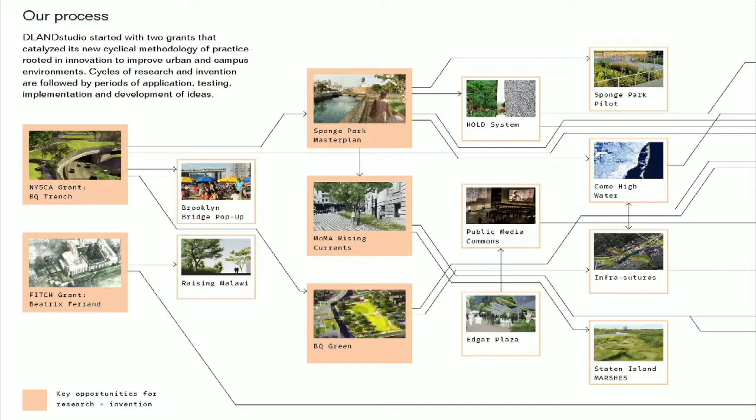So my practice started with a series of grant-financed prototypes, and each of these orange bands shows these grant-funded projects that were more theoretical, and the bands in white show projects that came out of that were real prototypes. I did that because when I started my practice, I was a small woman-owned business, and I couldn't get the kinds of large infrastructure projects I wanted to do, which tended to go to large engineering firms controlled by powerful public agencies that worked with the same old firms they'd always worked with. So you can see this evolution of grant writing and theoretical projects leading to real projects.

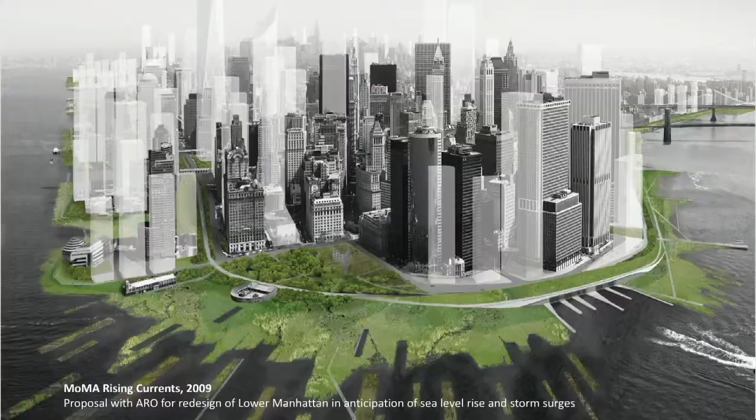Some of them have actually been projects like this, the MoMA Rising Currents project, which was on the theoretical end, obviously, but we worked with Architecture Research Office to design a complete revisioning of Lower Manhattan in the face of potential climate change impacts.

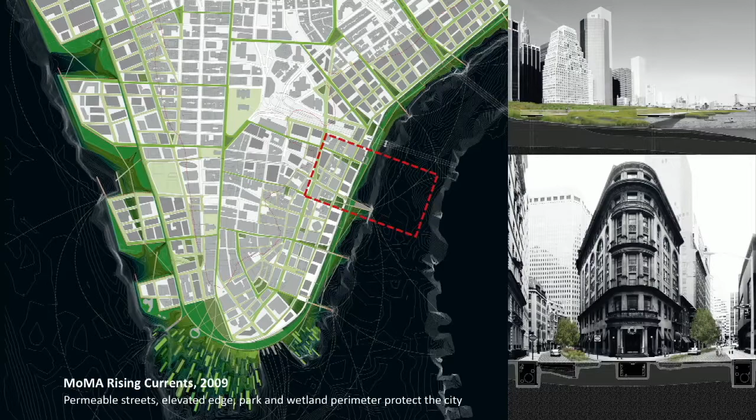So looking at preparing the city for a big storm event, which actually happened a few years later. We did this by reinventing the infrastructure, creating permeable streets, elevated edges, wetland perimeter, and using all these systems to protect the city. I think one of the things misunderstood about this project was that it was as much about an upland reinvention of the infrastructure by creating permeable streets and putting all utilities into waterproof vaults, as it was about creating a big elevated edge around the perimeter.

So a precursor to that project was actually the Gowanus Canal Sponge Park, and I think that's one of the reasons we were asked to participate in MoMA. We did this project in the Gowanus. It was a master plan for the Gowanus Canal area, which you can see is in Brooklyn.

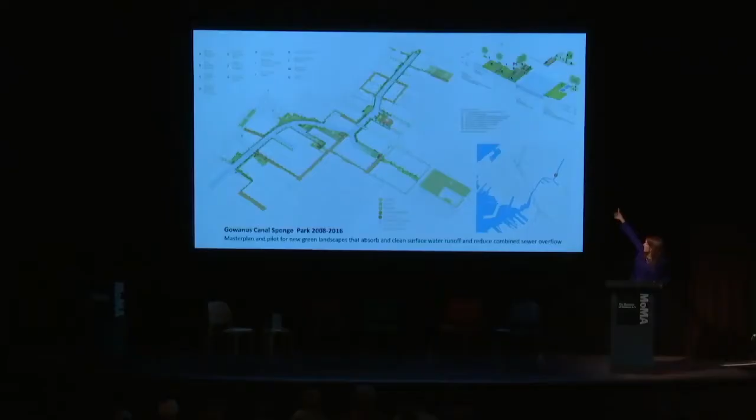This is very familiar to me, but this is Brooklyn, Red Hook, and the Gowanus Canal. It's now an EPA Superfund site, and it's undergone a tremendous transformation over the last decade, but it's a highly regulated landscape where there are over 200 permits you have to get for any waterfront project. As an example, in this diagram, the soil underneath the streets is controlled by the Department of Environmental Protection.

The ground is controlled by the Department of Transportation, which owns the land. The landscape, the green stuff, is owned by the Parks Department. The water that flows over the ground is controlled by the Department of Environmental Protection. The shade over the water is controlled by the Department of Environmental Conservation, a state agency. The sediment underneath the canal is controlled by the Army Corps of Engineers, although that shifted over to being controlled by the EPA Superfund people. So anyway, it was hard to get anything done there, to say the least.

But using grant funding and a pilot project, and doing it outside of normal procurement processes with all these grants, we managed to get a pilot, which is a new form of green infrastructure. This little street end, which may seem kind of inconsequential, took me 8 years to build because we're working in New York City in an EPA Superfund site. It absorbs about 2 million gallons of stormwater every year.

And when you take that to scale across the city, you could control 800 million gallons of stormwater every year. This is really important to the city because New York City is one of hundreds of cities across the United States under consent decree from the federal government because of their need to comply with EPA Clean Water Act rules. So there's tremendous potential here.

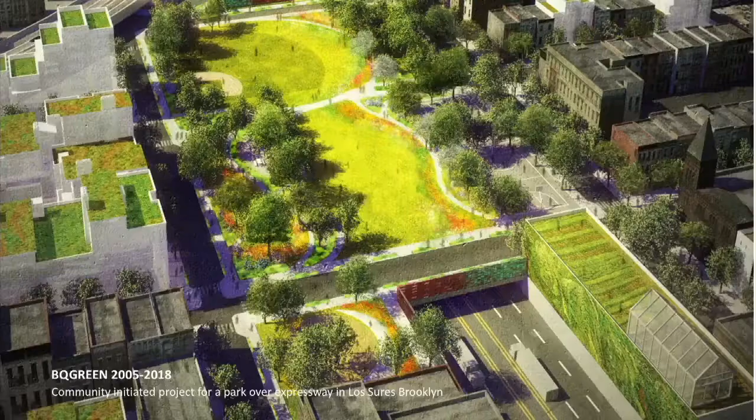Now this obviously applies to waterfront cities, but there are a lot of waterfront cities out there. So we're also working on trying to repair some of the really horrible things that happened because of the intersection of cities and interstate highways.

Highways weren't originally designed to go through cities. They weren't designed in a really friendly way to intersect with urban communities. This is actually a community in Los Sures, Brooklyn, where it was a community-initiated project, started with a woman named Diana Reyna, who brought us in to design this park over the highway, over the Brooklyn-Queens Expressway.

We've gone to tremendous measures to both design the park and create a superhero to advocate for the park, because we've really been fighting for this for many years. We've had rallies at City Hall and on the edges of the BQE because people in the neighborhood are being poisoned by the highway. The city really should take action and do something about it.

Building this park is one way to not only improve the physical environment, but also reduce some of the gang violence happening because of the rift created between these two sides of the highway, which creates a political boundary as much as an environmental nuisance. So that's something we've really been trying to ameliorate.

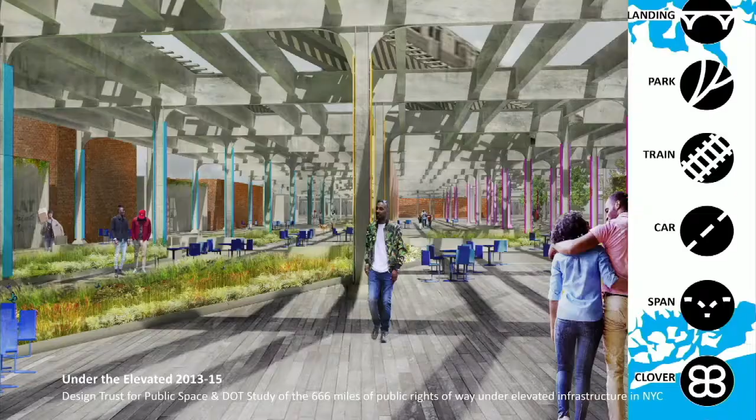We not only work over highways, but also under highways. We worked with the Design Trust for Public Space, and we do this a lot—we work with not-for-profit entities to further our projects. In this case, we worked with the Design Trust and the Department of Transportation, engaging with a public agency to make the prototypes become more real.

We worked on the 666 miles of under-the-elevated spaces in New York City and tried to come up with replicable prototypes that could be spread around the city. This was Broadway Junction, trying to improve this beautiful but currently quite terrifying space by improving wayfinding and bringing more natural conditions into the site.

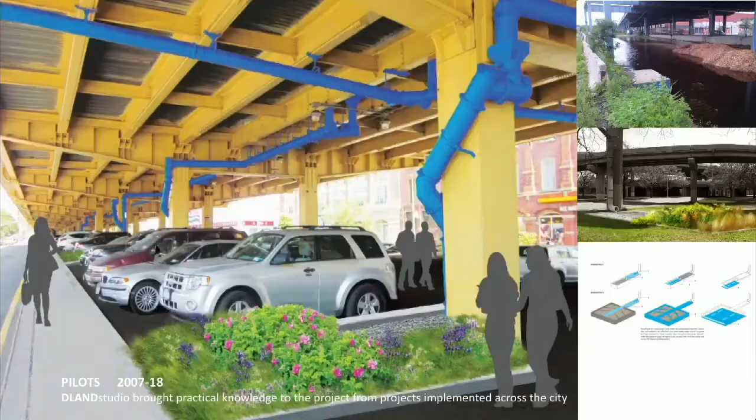We bring a lot of the smaller prototypes that we do with grant funding. In this case, this is a project we call HOLD, where we've designed various systems for taking water off of raised highways and bringing it into modular bioswales. I've gotten a lot of money through grants to do various prototypes and worked with the GSA and the EPA and other federal agencies to implement some of these projects.

What we did was take that work that had already been proven, and brought it to the Design Trust so they could bring it to the DOT so it might actually become a rule or new standard procedure. That's something we're chipping away at. We did that with the DEP, and we did that with the DOT as well.

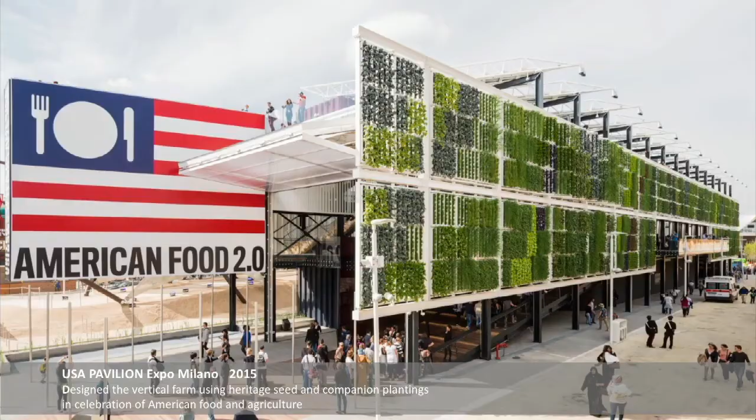We're also looking at new agricultural systems. This was the Milan Expo—the USA Pavilion for the Milan Expo that we designed with Jim Biber's office—looking at new agricultural systems for vertical farms, and also looking at how you might transform public parking into new modes of public occupation.

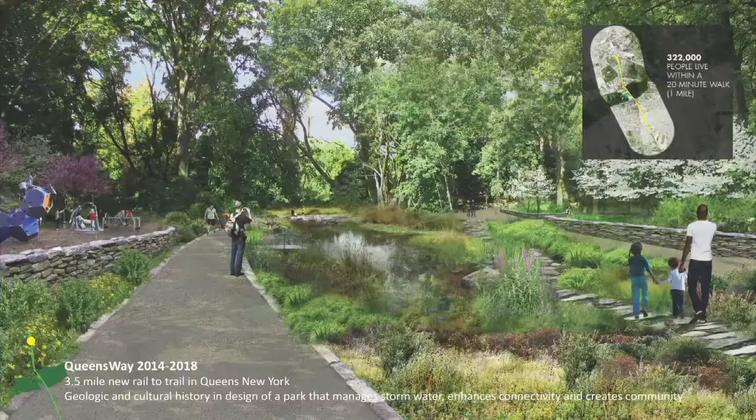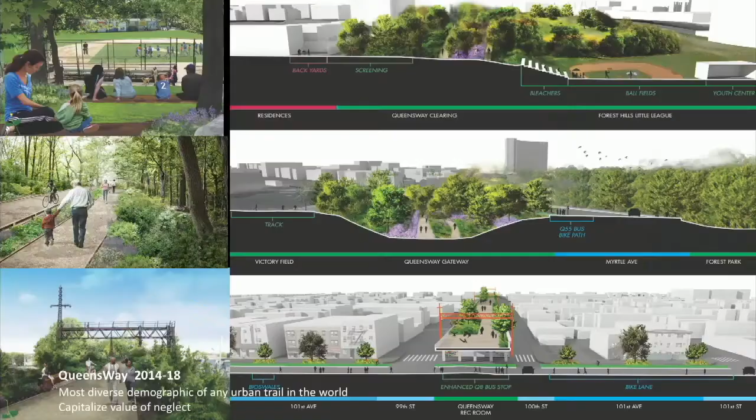This was working in St. Louis. We're looking at rail-to-trail systems. This is the Queensway project, actually in AOC's backyard—her congressional district. It's a 3.5-mile long rail corridor through Queens with a catchment of 322,000 people. We like to think this is the most diverse demographic of any urban trail in the world, because it goes through so many different neighborhoods in Queens.

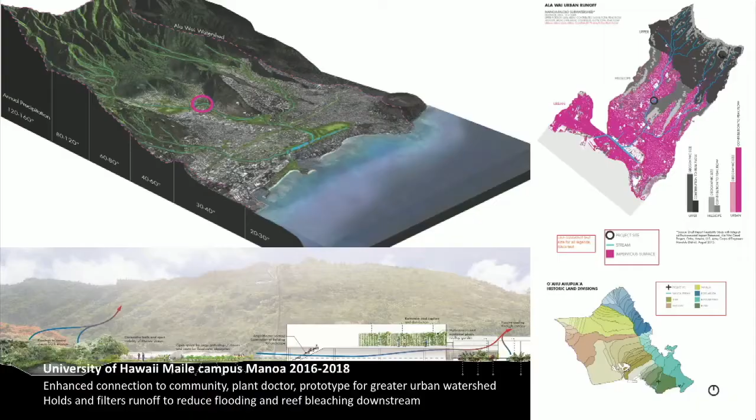We're also working in Hawaii, developing prototypes for the University of Hawaii on a prototypical campus that helps improve the water quality of that zone so that we can set a prototype for downstream areas.

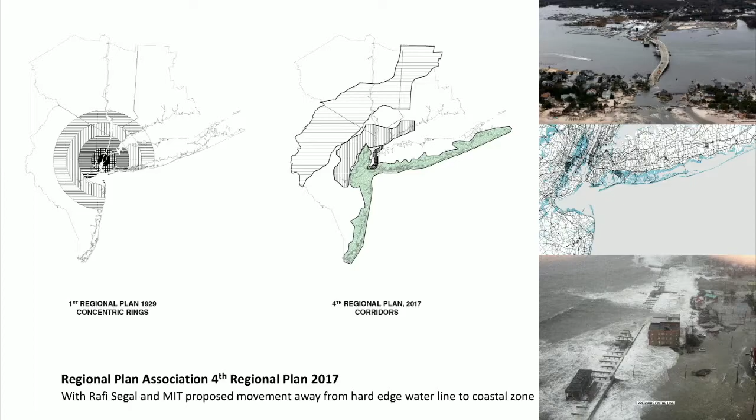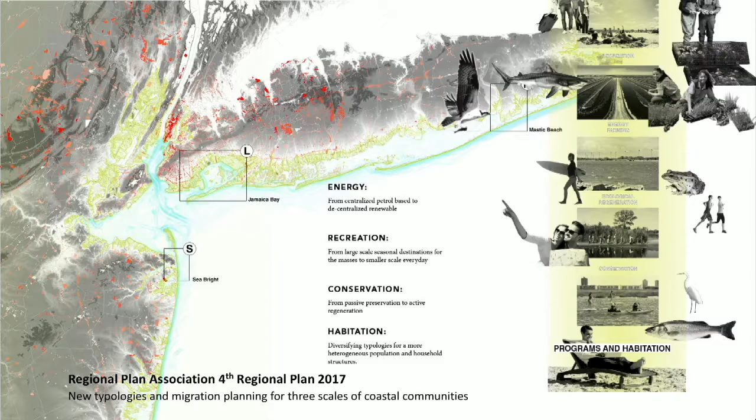And then finally, since I've got one minute—this is coming full circle, because in the first image I showed the MoMA Rising Currents project, and this is a project we did almost 10 years later for the Regional Plan Association. In this case, what we're advocating for is a slightly different approach. We're suggesting that we move people away from this vulnerable water line to areas out of danger, and then repurpose some of this vulnerable coastal zone for different productive uses: energy, recreation, conservation, and habitation.

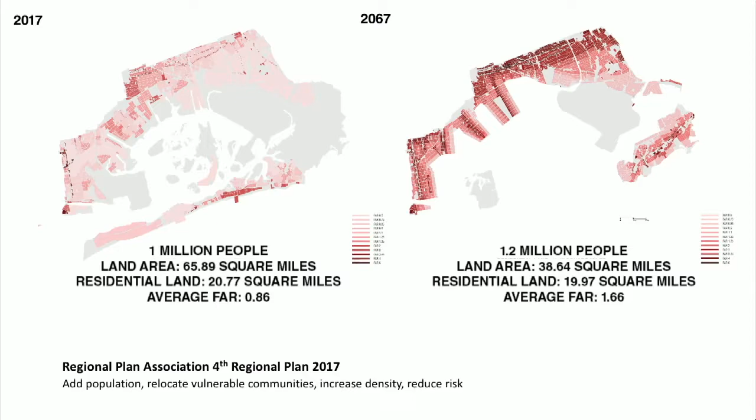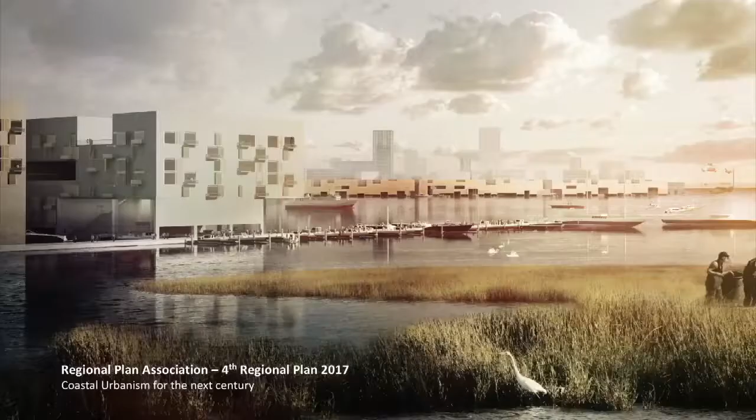In doing that, we're taking people who don't really have the ability to move out, and putting them out of harm's way, but also creating new opportunity for those communities, and creating a new kind of coastal zone and coastal inhabitation—really a new coastal urbanism for the next century.

I do want to show this video, which is why I went fast through those last ones, because it encapsulates the whole picture and what happens when you put it all together. I guess it's a little hard to know... there you go.

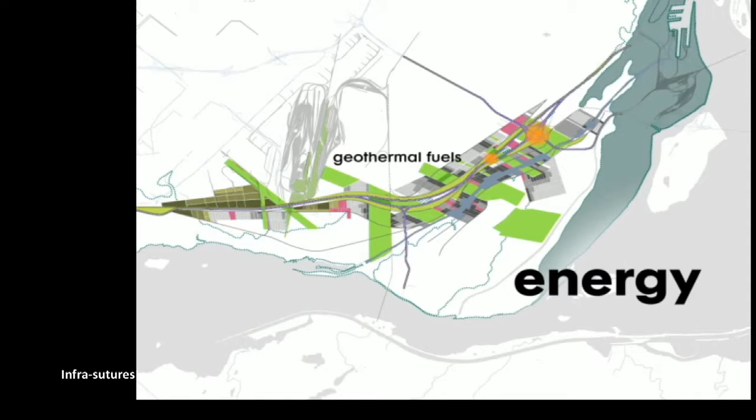So thank you. That last project was Montreal, and it really was focused on transportation. But as you can see, so many of those larger infrastructure systems have had such an incredible impact on our environment that they provide an incredible resource for us to make change. Thank you.